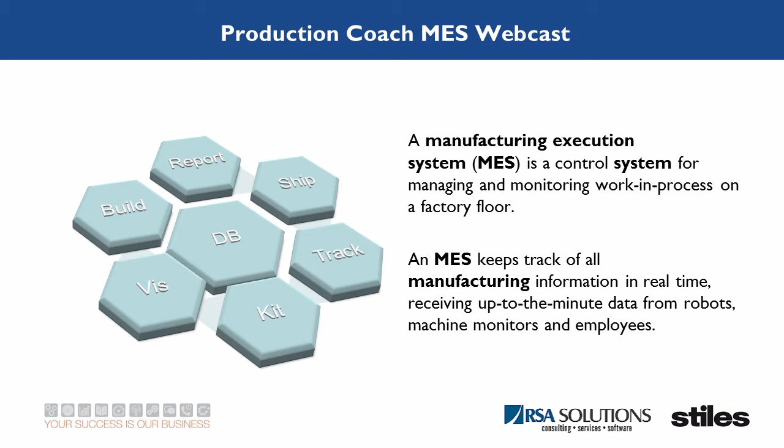Today's webcast again is about Production Coach. It is an MES system. So what is an MES system? It's a manufacturing execution system. It's a control system for managing and monitoring progress on the shop floor. It keeps track of manufacturing in real time, receiving up-to-the-minute data from bots, from machine monitors, and employees.

Recently, our company, RSA Solutions, conducted a survey out to a number of woodworking companies and industry consultants. We asked only 6 questions related to challenges and costs of production without a manufacturing execution system. And the results were pretty astonishing as to the waste and costs that were attributed to these questions. The result of this is Production Coach, our MES solution that is giving you not only a 360-degree view of your factory and operation, but increasing communications, reducing paperwork, helping improve production in a number of ways.

The first question that we asked out to the industry was, how much does it cost to find out where something is in production? Seems like that's something that comes up quite often with shorter lead times, more custom work, all kinds of things. A few of the slides that I'm going to show you are just because these wouldn't be things easy to necessarily show in the interface.

One of the things that we've done is we've linked Production Coach to the HOMAG Power Touch controller as an example of automated feedback, so no user intervention required to be able to update the status of where a work order is. Again, we can do this with a number of ways to be able to automate the process.

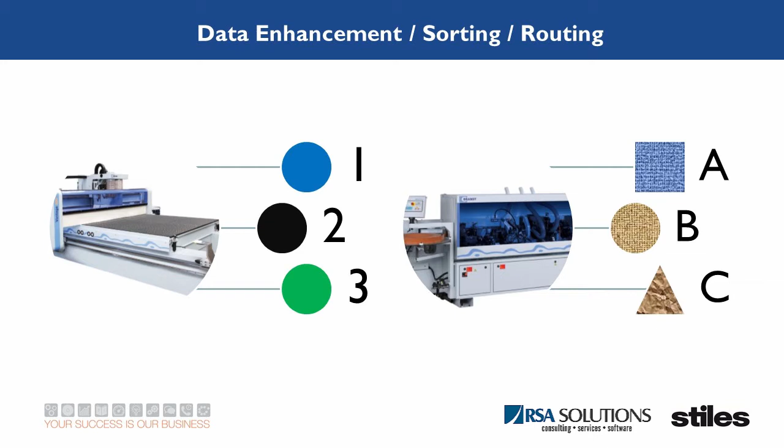Data enhancement, being able to make the data coming from your CAD/CAM system even more valuable, to provide more information real time so that we know exactly where things are, where they need to go, and to just keep everything fully organized. Tracking and being able to see exactly the status of any production order in real time.

And to be able to determine what might be missing from a given operation literally at the touch of a button. Being able to see in a really nice and visual way your goals compared to productivity within the shop floor.

The second question that we ask is, how much does it cost for all of the shop paperwork? Not only just the paper and ink, but also the time to prepare and process all of that paperwork.

From that, we created a great visualization that allows you simply with a scan of a part label to be able to see the parent or the part details, the parent product that it's associated with, the work order that it's associated with, and to see its position within an article, and the associated hardware for any assembly.

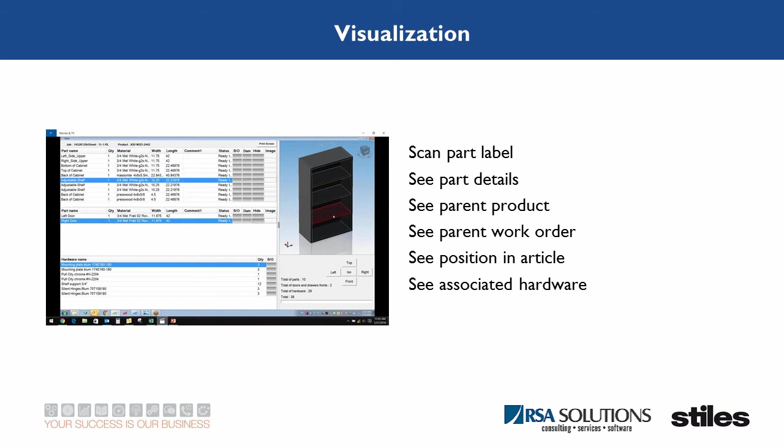So Production Coach is reading data coming from CAD/CAM systems such as WoodCAD/CAM, Cabinet Vision, Microvellum, spreadsheets, or other data sources, and being able to automatically render from reading those databases the products that are associated so that you have all of the details that you might need.

The third question we asked was, how much does it cost to expedite part shipment, because there were damaged parts alerts allowing for quick decisions so that it can become part of the assembly and not be back ordered.

And so we created, as a result of this, interactive production alerts that allow someone on the shop floor simply with a quick scan or click of a button to be able to designate that there was a damaged part or some kind of an issue, so that real-time decisions can be made about whether to remake and expedite the part or to be able to back order it.

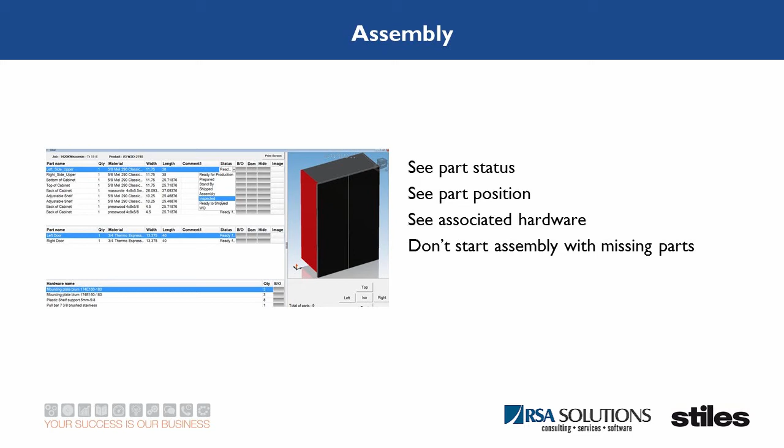The fifth question was, how much does it cost each time production has to come to the office for more information? Being able to click or scan to see all the detailed information, including dimensions, DXF, or whatever level of detail you need, is now available at the shop floor instead of having to constantly come to the office for better information.

The sixth question we asked was, how much does it cost to leave something off the delivery truck? You get that call saying we're missing a cabinet or countertop in the process. We give you an easy ability to scan products onto the truck to ensure they've made it in place, and we help with automatic and semi-automatic kitting of loose items—hardware bags, molding bundles, or whatever might be detached from the cabinets—to generate labels for these loose items or items staged after assembly onto pallets.

Now we can scan a pallet onto the truck instead of all the individual items, and of course give you a real-time shipping list that shows exactly what's been scanned on the truck, so we make sure we have everything required to get the job out.

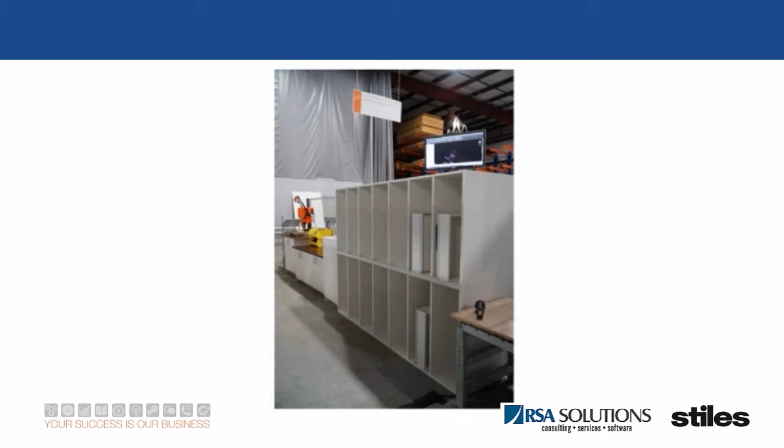In their facility, I'll skip through these so you can see—automated feedback comes from the first operation, the saw. It moves quickly through edge banding, CNC, and then to a sorting station. All the parts are sorted into one rack, doors and drawers into another. It doesn't turn green on the bin for the assembly person until both all the cabinet parts and the doors and drawers are available for a product. He grabs the parts, puts it together, scans any part label, which automatically spits out a product label, slaps it on the back of the cabinet, sticks it into the case clamp, and the system automatically marks that it's made its way through assembly. Finally it's pulled off and staged onto pallets for shipment.

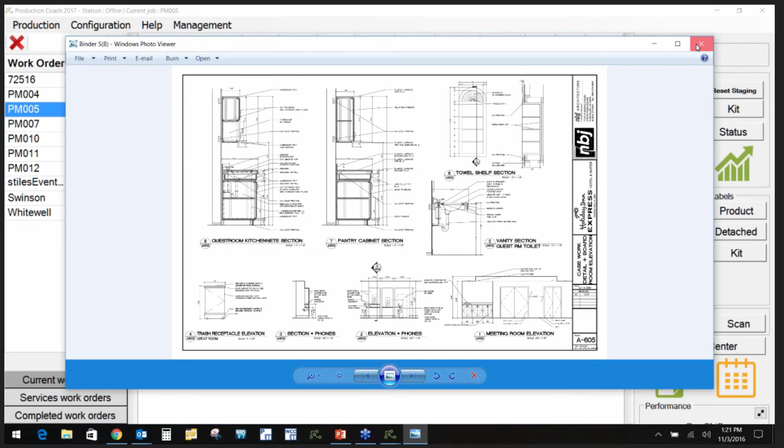I'm going to highlight for a moment on another order just to give you an example, because I have tied data to this. Just by clicking into this icon, it's going to allow me to see - we're using Dropbox technology so that you can share with the factory or installers or whatever it is any documents that you might want to have for this work order, so you don't have to worry about whether you're providing enough. Anything you want to be able to attach can be done. You can also attach the documents directly to the database for those inside of the factory, but if you use our Dropbox feature for this, then anybody with a smart device, an iPhone, whatever it is, can access that data immediately on the fly.

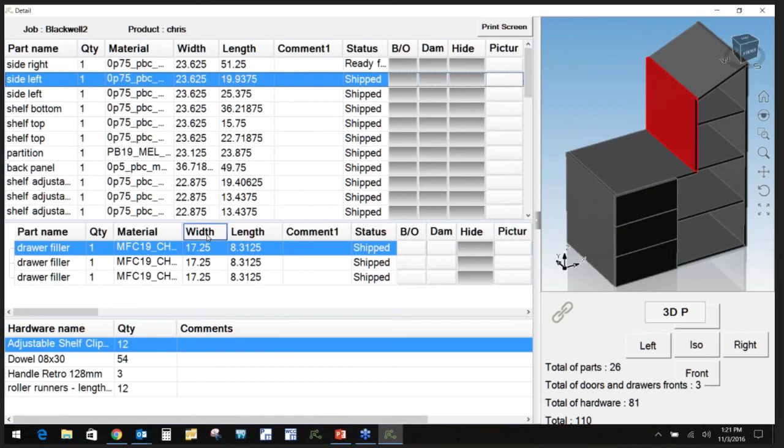So we're here working, we've brought in one order. Before we begin doing something with it, I want to give you an example of a barcode scan. In this case, a minute ago we talked about visualization, and so now I'm going to scan a barcode of a different work order than what this even was, and in doing so, notice what happened - it went and found the work order associated with that scan, it went and found the product, it generated a live model of this product.

Okay, so now I can look at this, create any kind of visual for it. You see, I'm able to move it around. If I wanted, I could hide parts to be able to see inside of things while I'm here. I can see all of the door and drawer kind of stuff here separate from the parts, as well as all of the hardware for this. So if I'm in assembly or whatever the case is, this could be a very, very valuable tool in figuring out what it is that I'm supposed to put together.

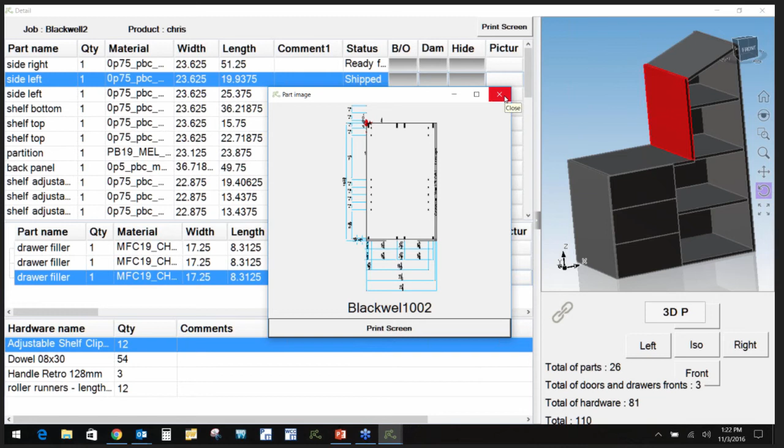But there are other features of it as well. Maybe I've got something going on with this part that I want to visualize. I can click into the image to see a screen view with all of the machining and attributes that are supposed to be happening with this particular part we're working on, so that it can be very helpful. Also, if for some reason this part I found was damaged, I could literally click a button and say, hey, this got damaged by edge banding or whatever it is.

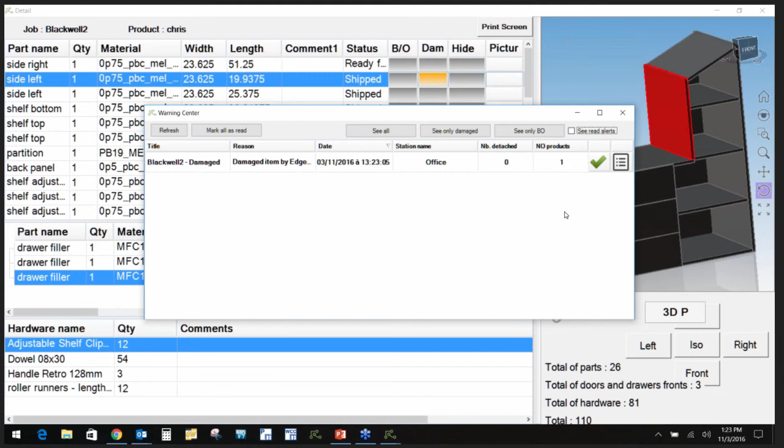And if you'll notice on my same screen, it's popping up an alert here. And if I clicked into it now, it's told me, oh no, there's a damaged part, what am I going to do with this? Now I can make decisions about whether it needs to be back ordered, or in this case, I'm going to tell this that I'm fixing it by the office and expediting it back through production so that it's going to arrive for the assembly person.

Okay, so now let's begin working with this PM004. Again, there are a number of ways that we can interface with this.

For example, I could select on something to be able to change its status and see that it was cut. I could do multi-selection. In this case, I'll shift-select and tell this that I want everything to say it's gone through the status of cutting.

If you had, for example, a Holzma saw with power touch control and automated feedback, it could know automatically when a work order was started and completed. If we were doing barcode scanning, that would give us the data as well. We even have a print-to-scan feature, since first operation doesn't have any barcodes to scan. You literally can just scan first and last to know we've begun and ended with that.

We could now even begin to look at our production status, because now everything has made its way through cutting. So we've got a percentage of our work order that's being completed as we're working across this. That makes a really nice way to be able to deal with it.

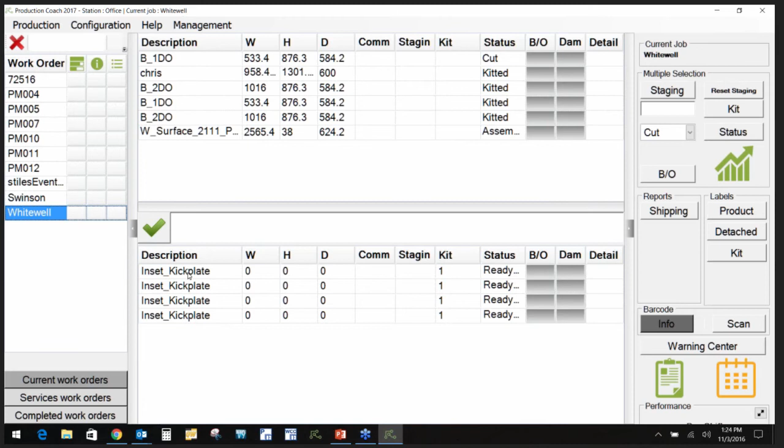I had a project over here that had some loose items. I could do a multi-select on those and say I want to create a kit for these. Now these became part of a kit. If I click the button for this, you'll see we've automatically generated a label. So now if I blow this up for you a little, you'll see we've created a pack label for all of those kick plate items so they'll get scanned onto the truck to make sure everything is there as well.

In process, what I'd like to do at this point is also show you the business intelligence dashboard. Here we're using Excel pivot tables to give you a live view of your production, and its progress gets automatically updated. So now we're able to see all of whatever it is we're looking at, could be products, could be parts, could be jobs, whatever we want to view. In this case, it's products.

I can see the production coming from the office, from cutting, from kitting, assembly, and we're also monitoring and tracking the number of parts happening between each of these stations or products, however you want to visualize it, because obviously to have a balanced workflow, we can't run out of work at a station, but we also can't have huge piles of stuff that we're tripping over.

On the right-hand side of this screen, you might notice these are the ongoing projects and their percentage of completion. Again, this is something that can be viewed in any kind of way that you'd like.

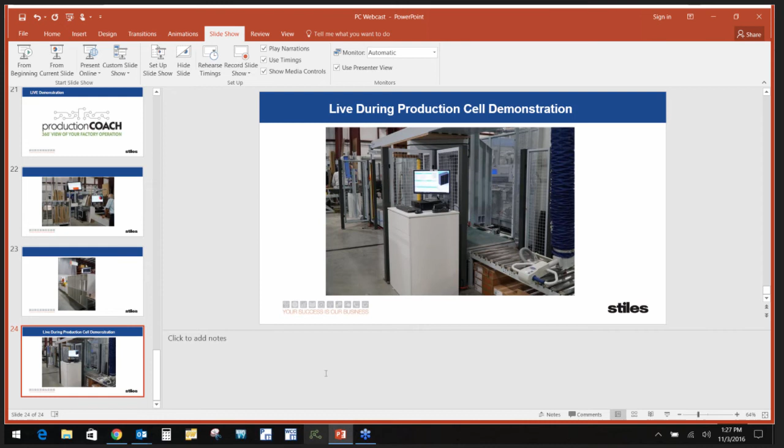Now what I'd like to do is close this particular interface, say quit, and reopen, but I'm going to now log into another profile, meaning like a different computer on the floor, and this one just happens to be called kitting.

I like the term sorting better, but the reason I want to do this is I want to click on this button, which is going to take me to a sorting station.

Now, in working with this, this is just an example. Some of our customers have fixed racks, some use mobile racks, some use combinations thereof. We can configure the system to work the way you want.

Again, I'll repeat myself that because this configuration represents what's displayed in the Stiles, North Carolina facility, they have one fixed rack that has 24 compartments for sorting of cabinet parts, and then they have another sorting rack for the doors and drawers.

So I'll show you kind of how this works, and we'll begin a process of scanning some part labels. Now keep in mind that I am scanning for the purpose of you understanding what's happening, but in a real production environment, I would be having all of these parts coming off the line, so they would be making up multiple products.

I scanned my first part, and it automatically told me where to place that part in the rack. So this is part 1 of 10 of a product, goofy name called PC_1F_1DR_1S, whatever that means. I'm going to scan the next one, and you'll see that this is counting.